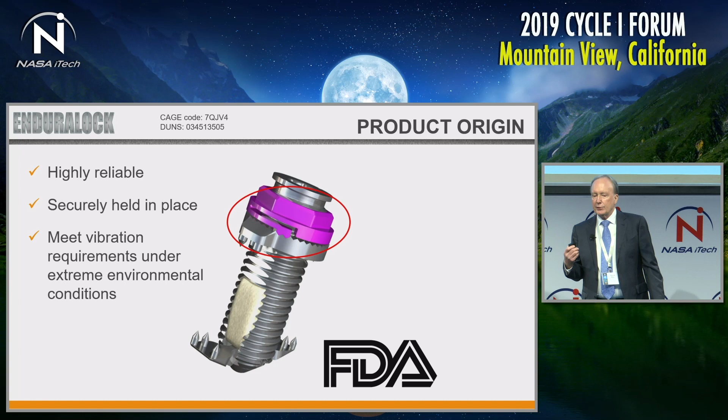Just as in spinal implants, an aerospace fastener, for example, must be reliable, held securely in place, and above all else, resist vibration.

Vibration-resistant fasteners have existed for years, but there are some problems with the current solutions. Enduralock has many attributes, but a key attribute is that it reduces the time and cost of installation and maintenance. If one looks at a huck bolt, it is a permanent fastener, but it requires specialized tooling to apply and needs to be cut out or drilled out to be removed.

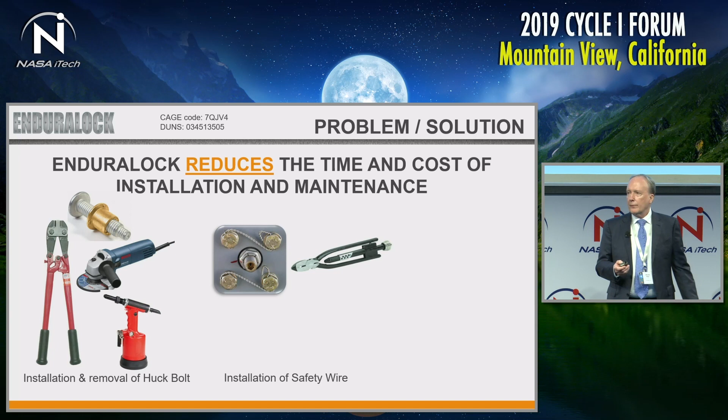And it's one-time use. It also cannot be retensioned should you get bolt elongation. Safety wire is very labor-intensive, therefore expensive. Castle nuts and cotter pins have the disadvantage of only providing for 6 gradations of torque per revolution.

In a critical application, such as on the landing gear of an F-35, the engineers will spec a very narrow range of torque because they want a certain preload. Well, when the mechanic goes to install it, if the slots of the nut don't line up with the pre-drilled hole, they take the nut off and try another nut, and they keep repeating that process until they find a little variance in the nut and things line up.

Well, with Enduralock, it's a simple, off-the-shelf 6-point socket to apply it and to remove it. And we can offer over 50 gradations of torque per revolution, and we can also retension the fastener.

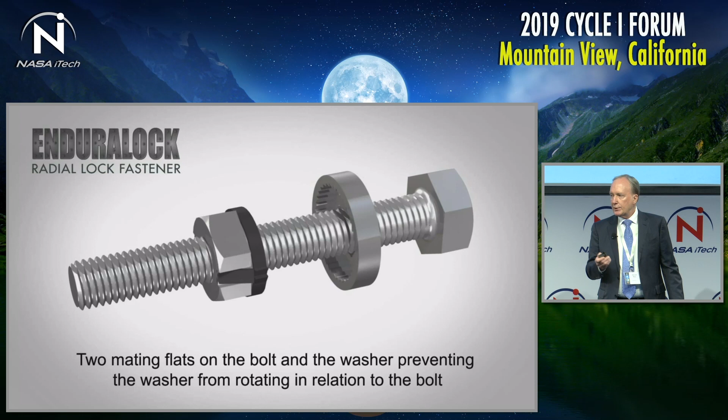On our Radial Lock fastener, we have 2 machine flats on the bolt that go down to the root of the thread, and the same on the washer. This prevents rotation of the washer.

We have circumferential teeth along the rim of the washer. We have a metal spring that has arms that snap onto the nut, teeth at the base. So when these components mesh, the nut can no longer rotate because the washer can't rotate.

But when a standard 6-point socket is applied, it flexes the arms inward, disengages the teeth, and now the nut is totally free spinning.

Because of that, we can then achieve an accurate preload or clamping force.

As soon as the socket is removed, the arms flex outward, engaging the teeth. The nut is now permanently locked.

But this same socket can be reapplied to remove the nut, perform whatever maintenance, and then reapply the nut.

In aerospace, the requirement for a self-locking nut is to withstand 30,000 cycles of vibration. In an independent test lab, we took ours up to 300,000. We then did tensile testing on the fatigue parts. They proved that to be a Type 1 bolt, Class 2 nut.

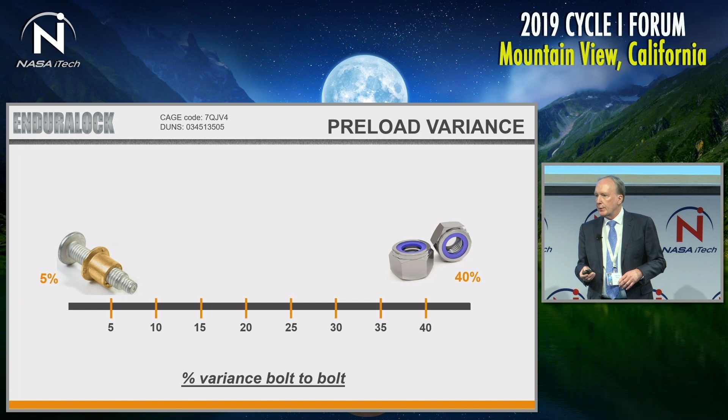If one looks at variability in preload, bolt to bolt, on one end of the spectrum you have a Huck bolt; they claim about a 5% variance. On the other end, a prevailing torque fastener ranges between 30 and 40% variance. We came in at 5.7%. So we have all the advantages of a permanent fastener such as a Huck, with the additional advantages of reversibility and reusability.

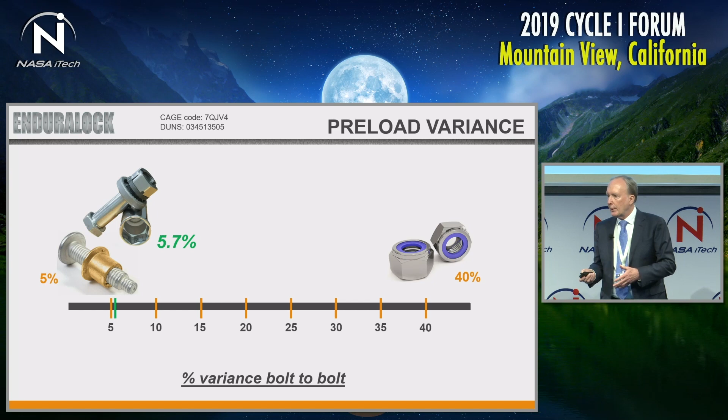Over the last 8 months, we have also designed fasteners that can employ a forging and stamping process. The reason that's so important is it dramatically reduces the cost of goods and will allow us to enter industries where cost is more an issue, such as automotive.

In our TIDAL fastener, we have a two-piece washer. The arms of the washer have teeth facing inward. They interface with the teeth of the serrated gear, which in turn is keyed into the nut. So when these components all mesh, it's locked.

When a standard socket is applied, it flattens the washer, disengaging the teeth.

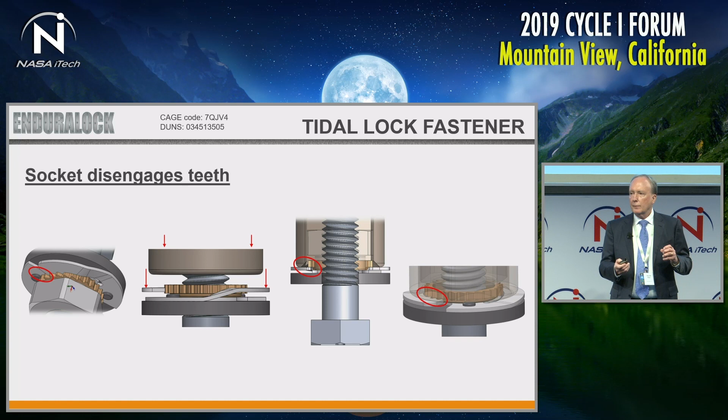We've also taken this technology and put it into the head of a threaded bolt. We eliminated the flats on the bolt. Instead, we have axial tabs on the undersurface of the washer to go into pre-drilled holes to constrain the washer in rotation.

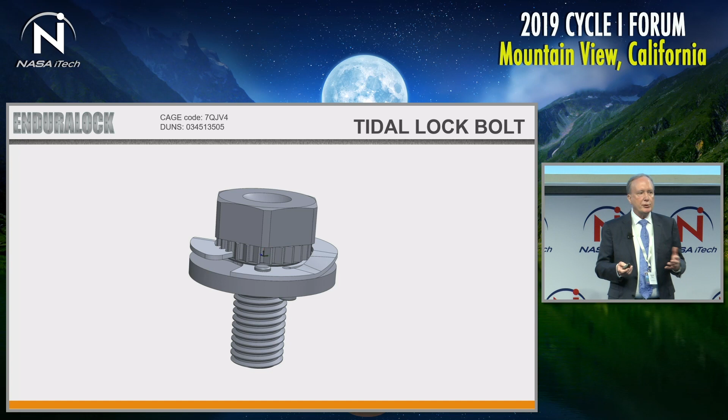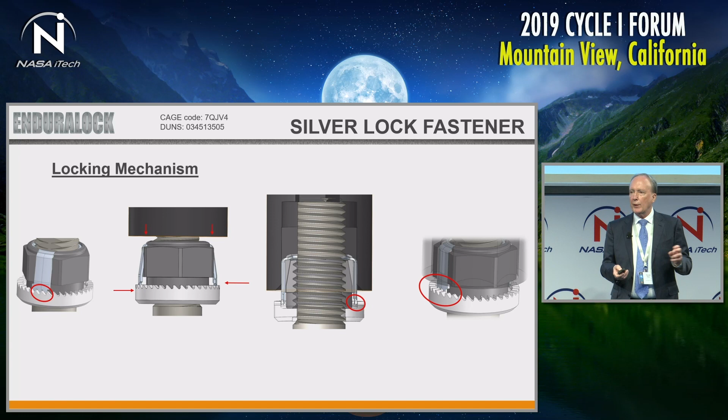With our silver lock fastener, we can stamp the lock member or spring. And with this fastener, again, it functions similar to the animation you saw. When a socket goes on, it flexes the arms inward, disengaging the teeth. And again, we've applied it to the head of a threaded bolt to provide for a locking bolt.

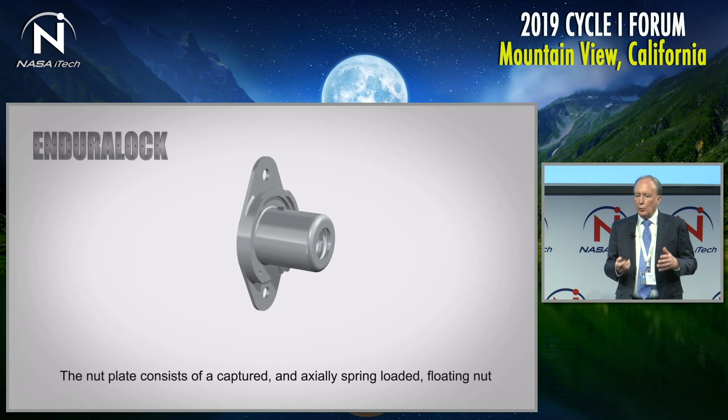We've also designed a new access panel fastening system that we believe will greatly reduce the chance of foreign object debris. We've designed a nut plate where the nut is actually spring-loaded.

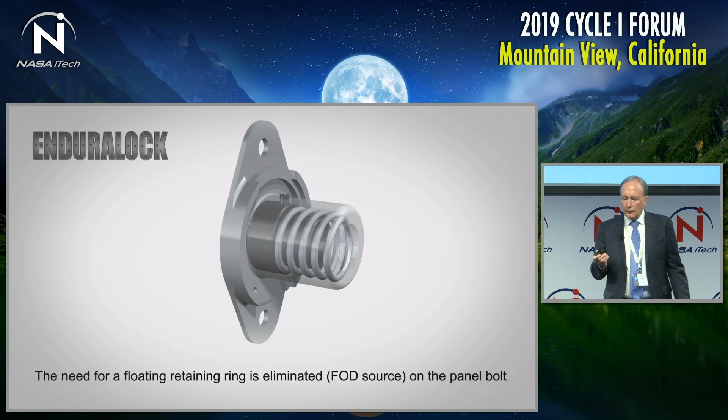With this nut plate, it allows us to establish a fastening system where the bolts are retained with a fixed retaining ring. Currently, the retaining ring floats up and down channels within the bolt. But the problem is those retaining rings can bind, then break, and lead to foreign object debris. With a fixed retaining ring, you don't have the motion, so therefore it's much less likely to get breakage and foreign object debris. And we can make the retaining ring also much more robust than it's currently used.

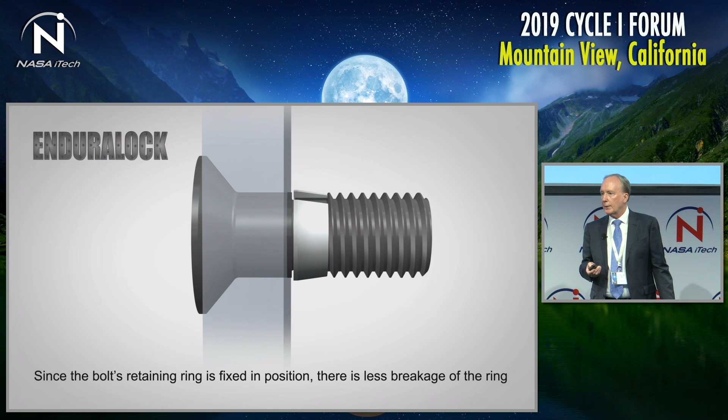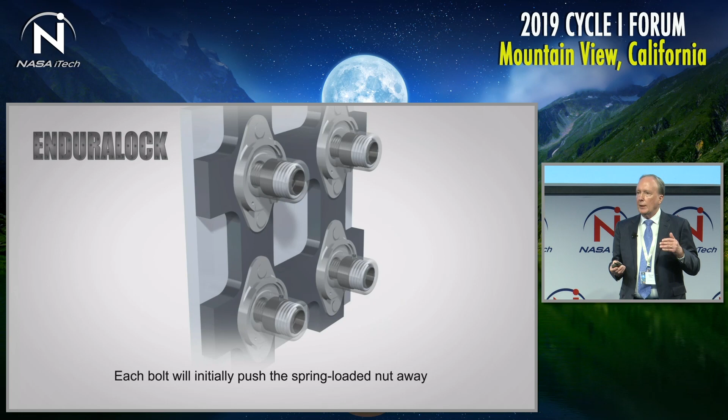So when the bolts are all applied and you put the panel back onto the substrate, what it essentially does is push the nuts away from the substrate since they're spring-loaded. And what that allows you to do is individually tighten one bolt before moving to the next. Without it being spring-loaded, you would literally have to do quarter turn, quarter turn, quarter turn, all the way around the panel to get it off.

Here, you can just do the entire bolt, put it on, or when you want to remove the panel, take one individual bolt and loosen it totally.

We've gone to great lengths to secure our intellectual property. We have 9 US patents issued and a Canadian patent issued. We are patent pending on 17 others between the US, Canada, Europe, and Japan.

About 6 weeks ago, we got a request for a product from Ground Vehicle Systems Center, which is the Army's research center for tanks and ground vehicles. They want to have the bolts and do ballistic testing. The application would be attachment of armor.

If one looks at how they currently attach armor, it's a normal bolt, which they have to have a high preload to keep the armor on. But the problem is when you get a blast force, it will want to make the bolt either travel inward or travel radially to the side, depending on the orientation of the blast. But it can't do that, so instead the bolts shear at the head.

A few years ago, the Army did testing where they put the bolts on with less preload. In other words, they were slightly loose. And what they found is they survived the blast. But you can't have loose bolts holding your armor on, because the armor would fall off.